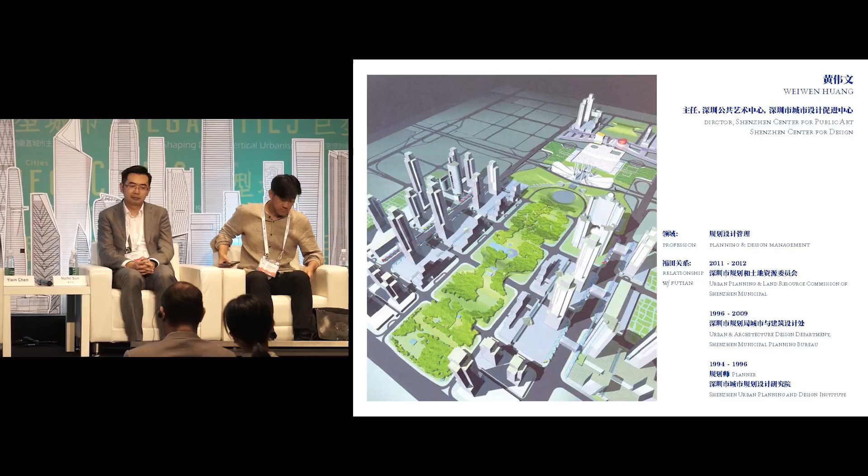Huang Weiwen. He's the director of Shenzhen Public Arts Center, and he's been working with Chen Yixin for many years. He's also contributed heavily into the urban planning in Futian district. And the new height of the city, North Tower of Ping An Bank, is under the responsibility of Mr. Huang as well. He's a longtime friend of KPF.

And next to him is Li Mu. He's the executive director of Ping An, and we know this Ping An Tower will be completed by the end of the year. It's going to be the new landmark of the city, and we also have the developer on the panel to share their insights and comments.

And finally, it's Mr. Li Mingyi. Maybe you don't know him very well. He actually worked with Chen Yixin together in the early days. He's the consultant, a Chinese-American.

The reason I'm talking about him is that he's my uncle. I know he's the architect, but I didn't know that he has such a profound relationship with the city. It only came to me rather lately when I was preparing the presentation. So I called my uncle and asked him to share with us some of his insights for the city.

And me personally, I'm from KPF. I've been involved in the Ping An Tower since 2009, so that means I've been working in the city for 9 years.

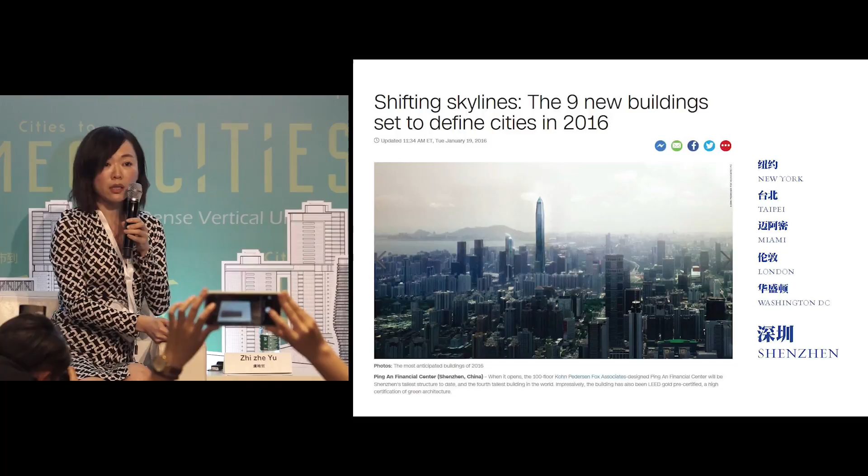I'm not putting the slides here because I'm involved in this project. I actually want to allude to these other cities like New York, Taipei, Miami, London, and Washington. These are very old cities, and Shenzhen is very young, only more than 30 years old. Now Shenzhen is ranked among the other peer cities. That's something profound for the city.

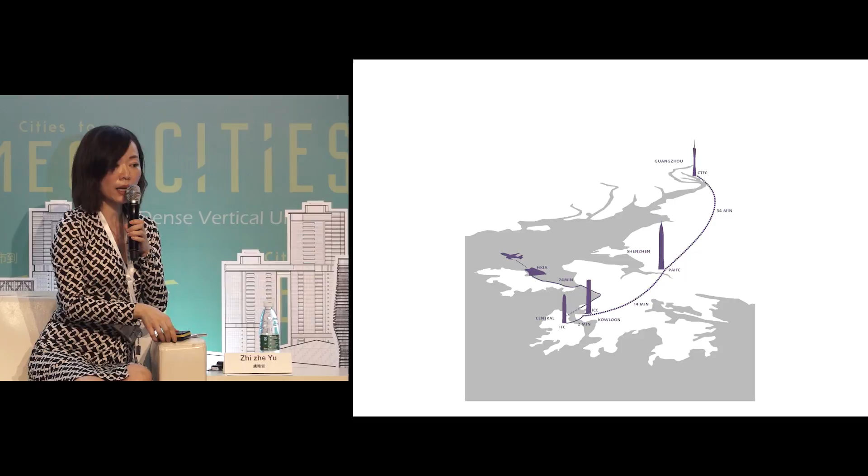This is the high-speed rail between Guangzhou, Shenzhen, and Hong Kong. After Ping An Bank, you can see the high-speed rail goes all the way to IFC, Hong Kong, and Guangzhou. So as you can see, Shenzhen is becoming more and more important in the Pearl Delta. That is the development of the city.

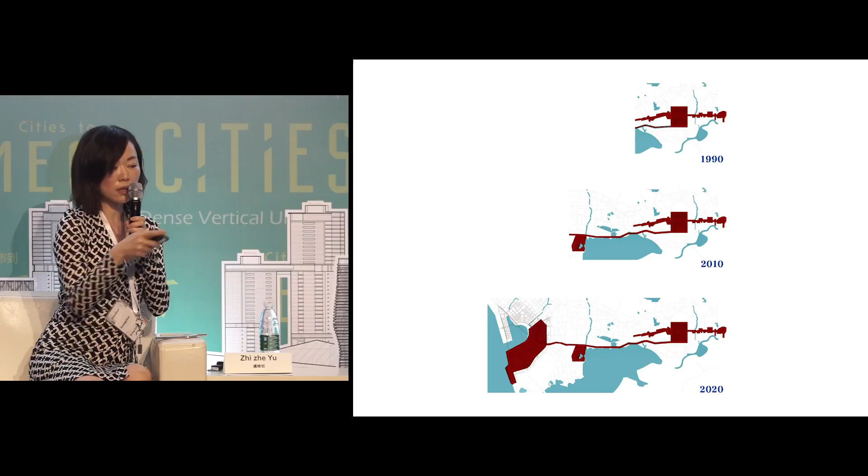In a nutshell, we started in Luohu. The city has developed like a line, and then it goes from Luohu to Futian, but still it's the center of the region, and then it goes to Houhai and Qianhai.

This is also a quote from Ms. Chen Yixin. She said, Shenzhen is a city built upon blueprints of the city plan, a miracle in the history of city planning. Futian Central District is a great example. As you can see, this is a place developed from scratch over 30 years.

I have some historical lineups from the Futian district, but I'd like to give the floor to Ms. Chen Yixin. This is the location of Futian.

That's exactly the center of the special zone of Shenzhen, like Ms. Yu said. Futian CBD is developed exactly according to the blueprint of the city, as the second CBD after Luohu. So coincidentally, in 1981, the master plan of the city established that the Futian CBD is going to be the city center of Shenzhen.

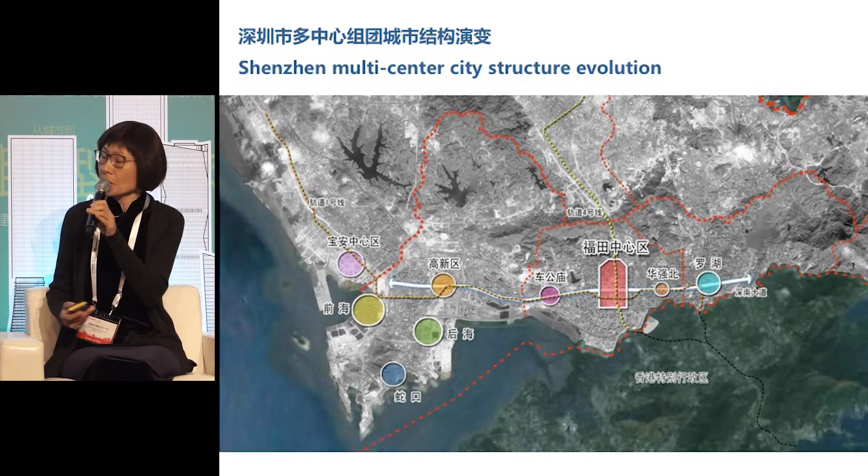And in 1992, it's been positioned as a financial CBD center. So the function has been implemented, meaning the financial sector is prosperous now, but the form is not actually fulfilled as the city center. That's why we have this topic today called Re-centralization in Futian.

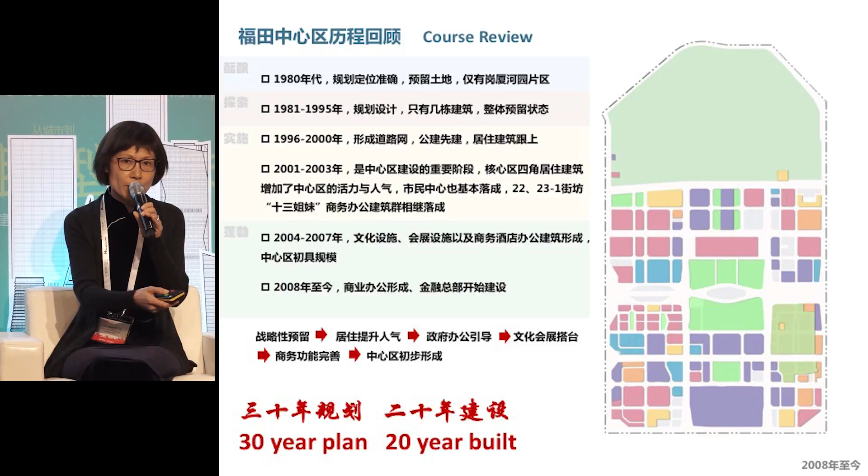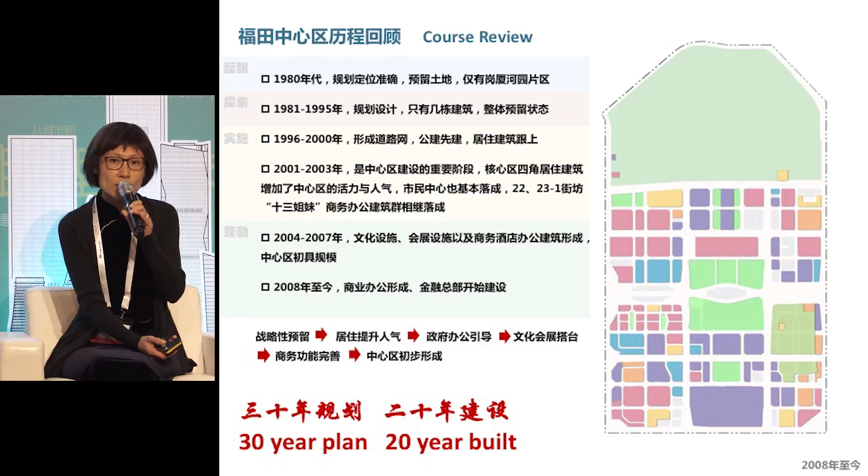Just for your reference, the difference for the past 35 years. Before 1996, Futian CBD had only a handful of projects, and most of the projects have been constructed after 1996. It's been developed in 4 stages, and now 95% of the projects have been constructed.

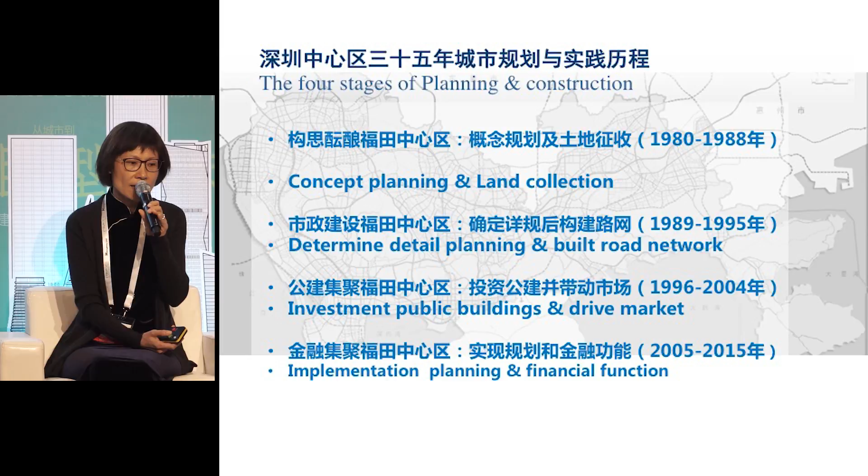So the 4 stages: in the first stage, from conceptualization to land acquisition. In the second stage, it's about detailed planning and construction of the road network. In the third stage, we have public investment to drive the market. In the fourth stage, we have implemented the planning and financial functions of the region.

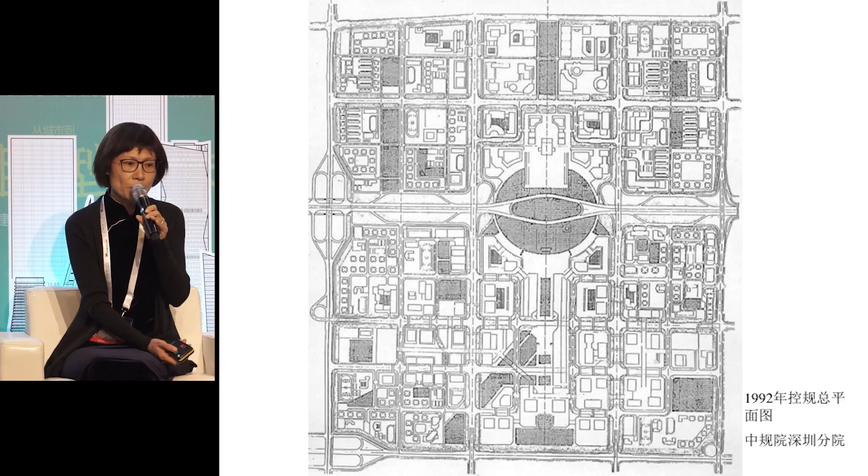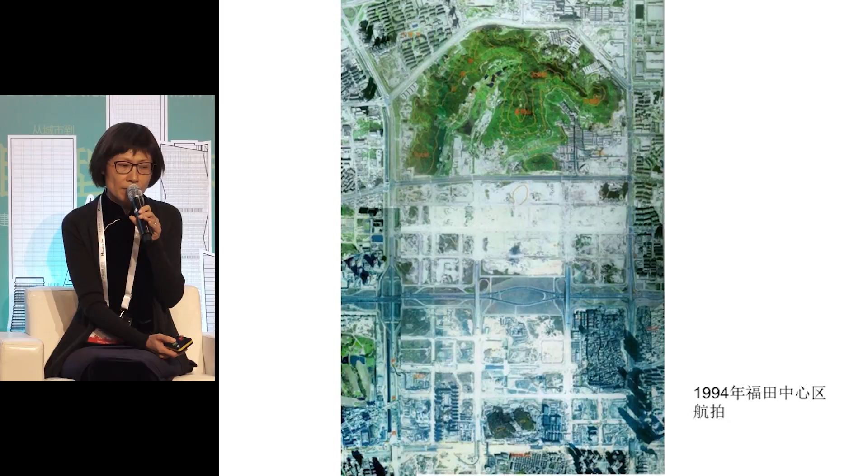Then in 1992, the controlling master plan was confirmed. This is Futian CBD in 1994, the area view. The road network just started its construction. It's empty land, also the old Gangxia village and some planned buildings and other buildings.

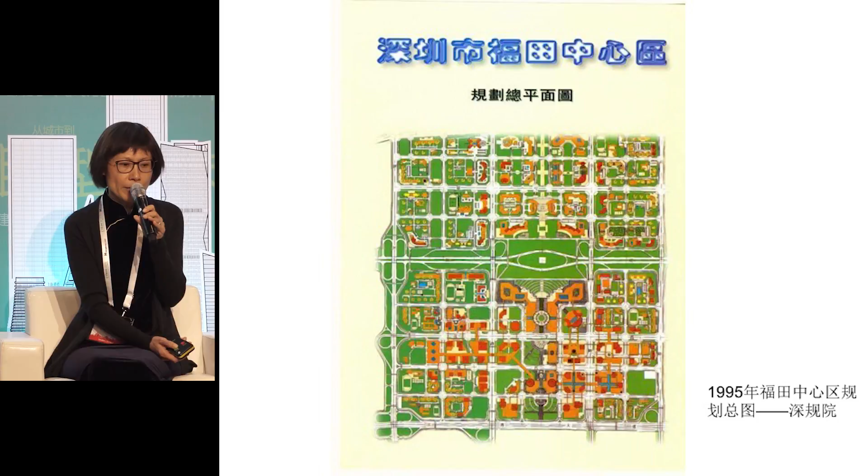This is the model in 1995. The Twin Tower is the current location for the convention and exhibition center of Shenzhen, close to Shenzhen Ping'an Finance Center. That's the master plan in 1995.

This is in 1996. John Lee's firm was awarded for the urban design and the civic center. This was the first time the central axis extended from 2D to 3D, starting from here.

In addition to the urban design, another important thing is the civic center, which is a red, yellow, and blue building in the center. That building is based on the scheme of John Lee for implementation. That was the scheme during the building stage.

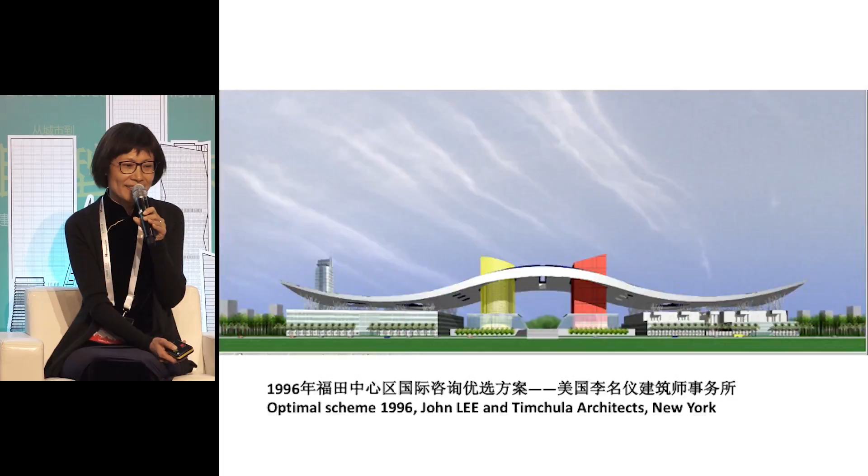This is the central axis for the urban design. The urban design along the central axis separates pedestrians and vehicles. Based on that, there are also several rounds of further in-depth development.

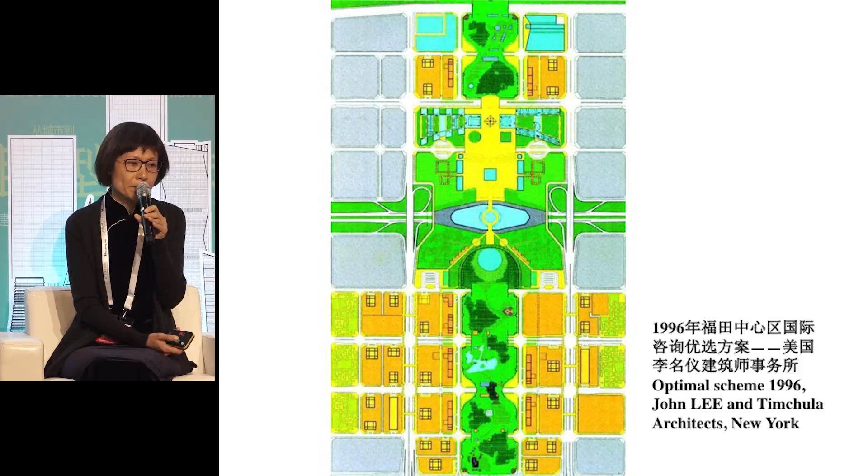Until now, it's incomplete implementation. The central axis, up to now, we haven't had the complete line yet. Only part of the scheme has been implemented.

From this perspective, we can see the municipal government over the past years had a forward-looking vision to leave this part, waiting for development after the surrounding area was established.

So Futian CBD, it's lucky. In 1981, the government determined it as the center of the Shenzhen special zone, but the land was just reserved until 2005, 10 years ago. We still have more than 10 land parcels used for finance head office buildings. This is the optimal scheme in 1999.

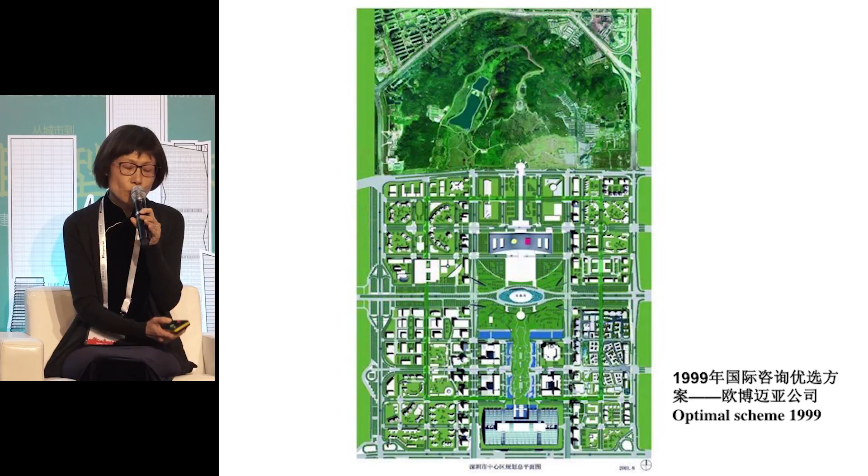So for the central axis, based on the previous plan, it's further developed gradually, but not yet fully implemented. I believe later there will be better enhancement.

Up to now, for the CBD, 95% of buildings have been completed. That is, of our previous plan of about 12 million square meters of floor area, close to 11 million square meters are finished. 64% are for office buildings.

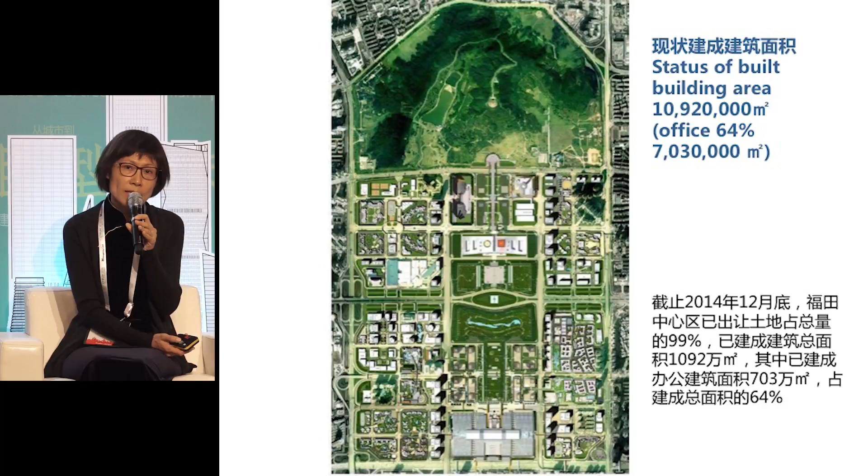So it's realized the CBD combination with the admin, cultural center, and also transport hub. Functionally, it has realized its role as an urban center, but in formality, it has not formed the prosperity with more people, and also for providing people with daily recreation, entertainment, and different aspects. That is a pity for us.

Therefore, today we will further extend the topic of re-centralization of Futian. Thank you.

It's my pleasure to have discussion with you. Over the past 30 years, Shenzhen has developed very rapidly. I believe in the next 30 years, Shenzhen city quality will further improve.

Today, my main topic is related to open space. We believe open space will be key for the next round of city update and environment quality improvement. That will be the focus.

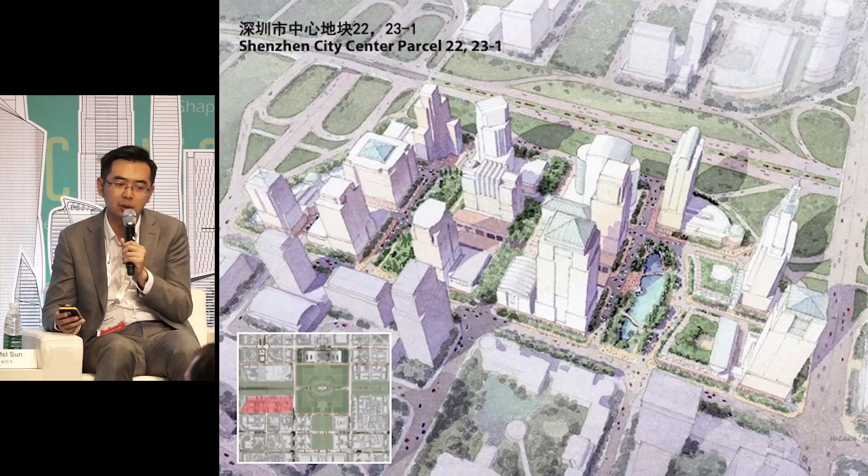This is combined with our previous city planning project in 1998, the research and conservation. For that project, it's in Futian, the Central Park, west part and southern part of Shennan Boulevard. For the original planned road network, you can see here, it's 70 hectares. So for the open space, it's relatively small.

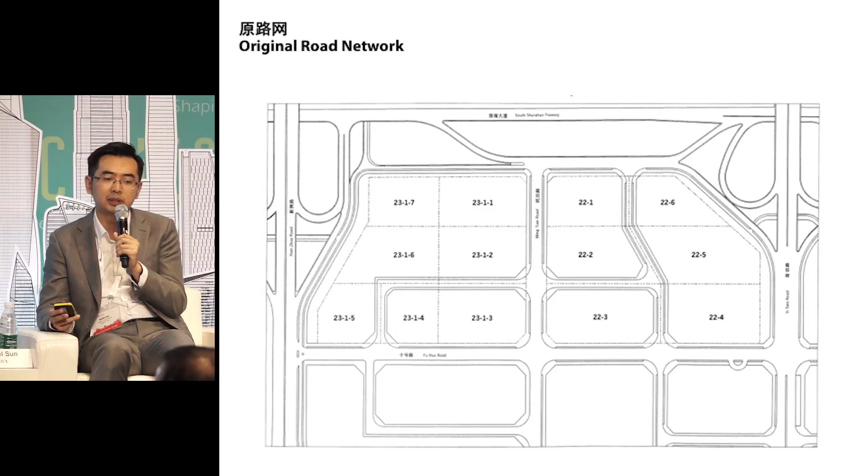For the north parcel, they have a good view, but in the center, in the hinterland of the area, there's not too much landscape value. Our idea is that we hope we can add open space for the area, both east and west, to have parks. Through addition of open space, the value can be further extended to the hinterland.

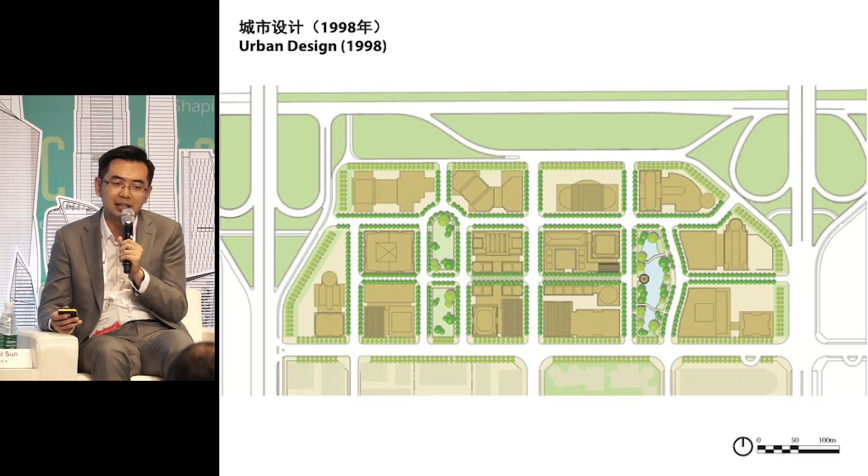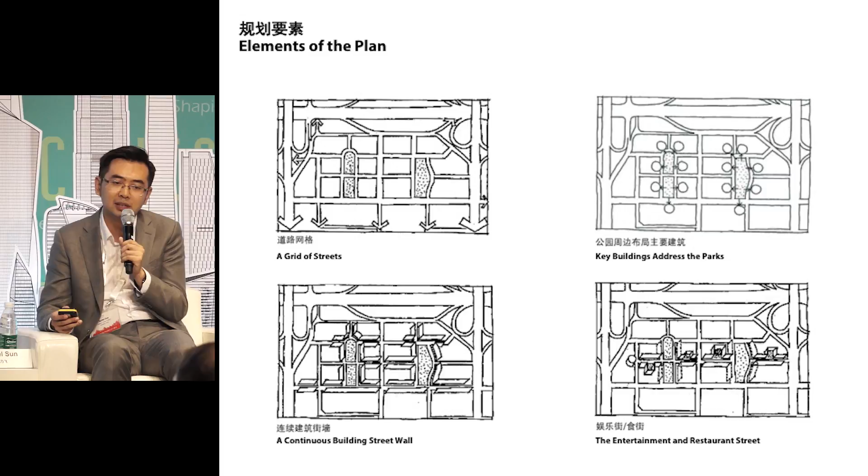Based on that, in the planning, we also add this grid system for the road network. With this available, through urban design, we can further define the limit elements for the buildings, define the street space, park space, and the towers arranged along the park. This gives a better value attraction.

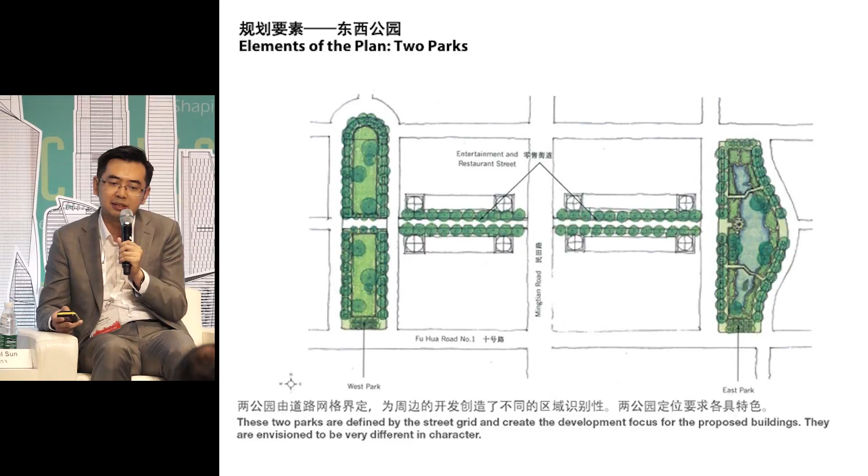For the two parks, that is the focus of the scheme. On one hand, they are different in forms. On the other hand, for future implementation, they are designed differently. This is to distinguish the two different plots.

Between the two parks, our idea was to have a Lantern Street, combining the Lingnan climate with an arcade street, minimum of 3 meters wide. Behind it there will be some retail and entertainment area, providing space suitable for pedestrians.

After 10 years of development, the region has been completed. From the urban design perspective, its implementation is quite complete, fully reflecting the previous urban design aspirations for urban street scale and the spatial layout relationship.

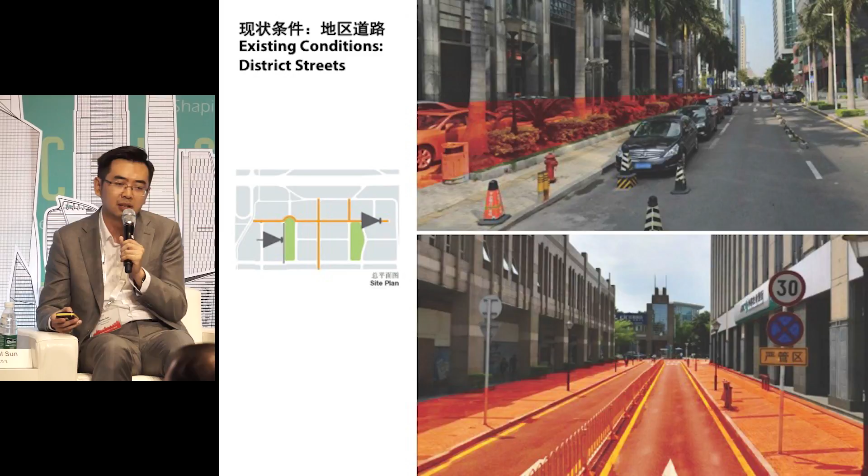After several years of development, we are thinking about what further enhancement we need for the public space and street space. In the future there will be further space for improvement. Now there are some issues - some are urban management issues, some are street landscape design issues, like motor vehicle parking that's still random.

For the greening, it's not yet completed, and the street view furnishing looks too simple. Besides, we feel for the park space, there's still value for further improvement.

After the two parks are implemented, they become important features for society. For the east, more water, and for the west, more open space. For the west, we can add some trees, giving more shading effect in the rainy season.

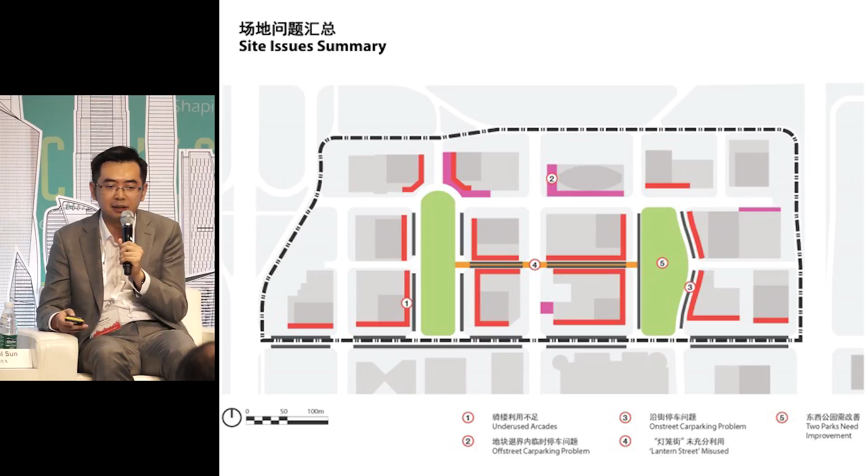For the city's public space - both the park, street view, and the utilization of the arcade - I think that's a further aspect for improvement. This will become the future key point for this region, including the Futian district area, for spatial quality improvement. We hope we can build better street view and environment.

But if you have random roadside parking, it would destroy this pedestrian environment. So we can deploy some new parking space around, or leverage Didi taxi or car hailing service. Then we can reduce the demand for private cars to park here.

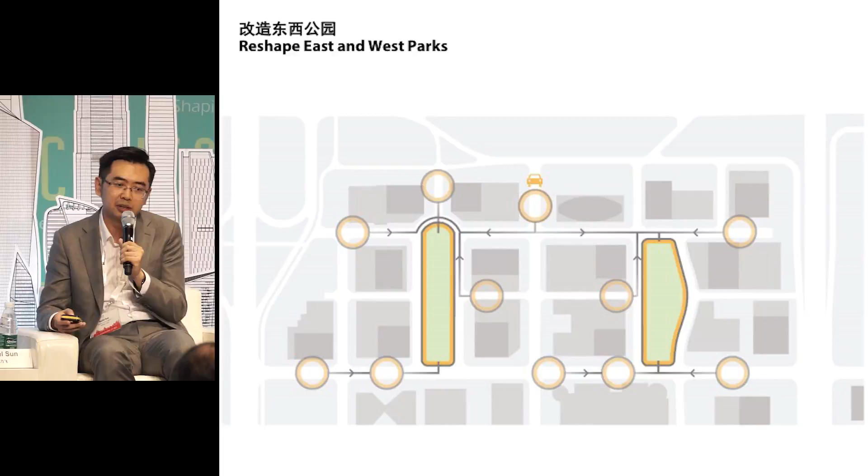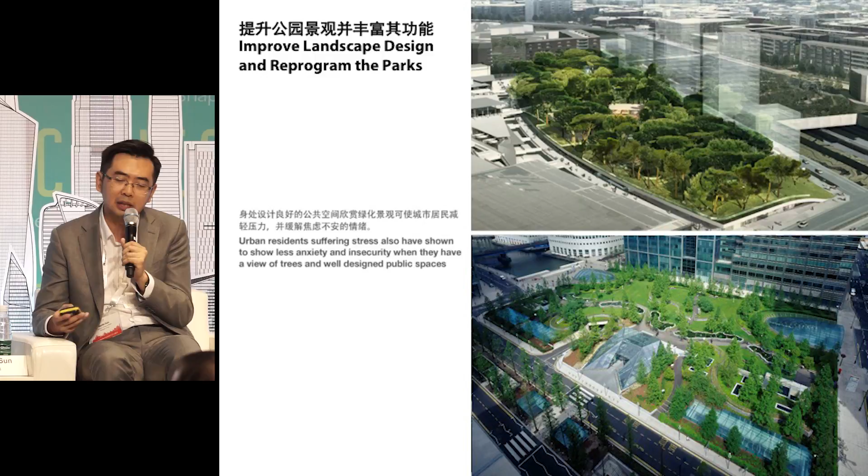For the east and west park, we also have reshaping comprehensively, as mentioned earlier. For the west park, it has fewer trees, so when we make the modification, in the underground space we can have local parking space. Above ground, we can have more landscape enrichment, like introducing more colorful biological modalities, and also add recreational facilities. The purpose is to have more activities related to public art, providing rich experience for the people.

For some streets, they do not have trees yet, so we hope for these areas we can have more green streets. In summer, it can have a better shading effect, and meanwhile help clean the air, providing better quality.

Besides, for some details, they are also very important for the urban quality, like the street furniture and the pavement. These element enhancements can improve the environmental quality of the area and also enhance the features here.

Today, people are paying more attention to so-called smart city or pedestrian-friendly city concepts. Previously, the lighting on the street was more for motor vehicles to travel, but in the future, for the park space, there will be more light for people and pedestrians, providing a safe environment in the evening.

Besides, for smart city, there's a lot of content related to smart public space. Along with internet technology and mobile development, many interact with the city. For example, for future landscape improvements, there will be interactive lighting and water views through a mobile app where you can interact. Our purpose is to provide more interesting, charming, and active public space for the city.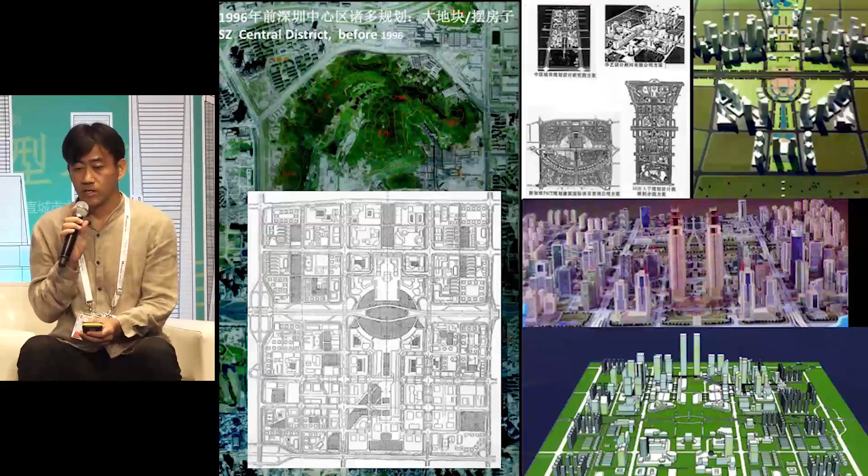Ms. Yu and Ms. Chen already introduced some information about the CBD, so I will go through this quickly. This was in the 1990s, with different kinds of designs. At that time we were just arranging different houses. In 1996 we had our urban design. John Lee's urban design made it in good order, creating a central axis that is more open and continuous. That laid the foundation for the CBD.

This central axis being open for the layout was from 1997. The Japanese architect further turned this into the ecological 3D expansion axis.

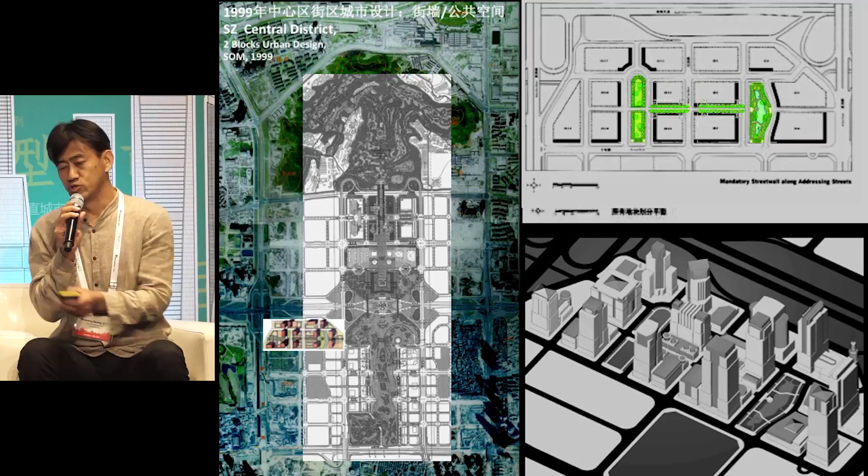This is in 1999. SOM developed the street block design, which he already explained just now. Also in 1999, we invited a German design firm to optimize the urban design.

The density was further enhanced. Then we had two tower zones, symmetrical to each other. Local design firms further developed the axis and block urban design, etc.

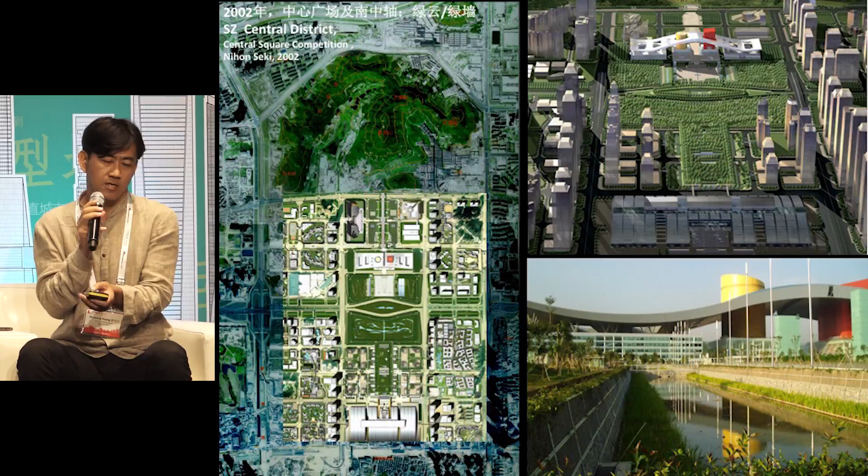Then for the central plaza we held an international competition. A Japanese architect provided this guiding proposal, making the central park more green, like a green cloud in the center of the city.

The island was awarded to OMA and Urbanus. They provided us with this proposal. In general, the intensifying density of Futian CBD has been growing.

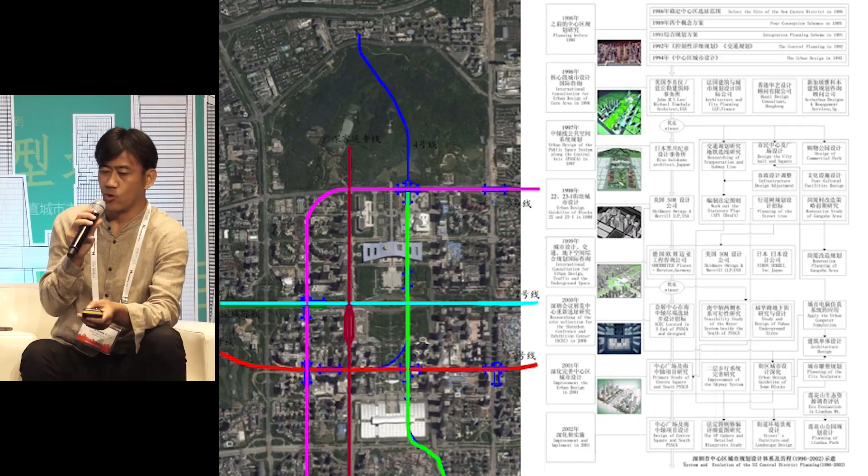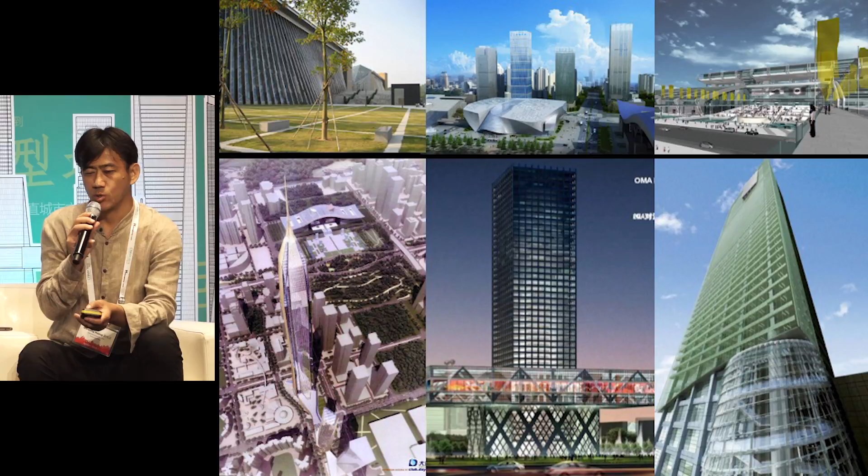We had evolutionary design development, and then we had architectural designs from many masters. That's the vicissitude of Futian CBD.

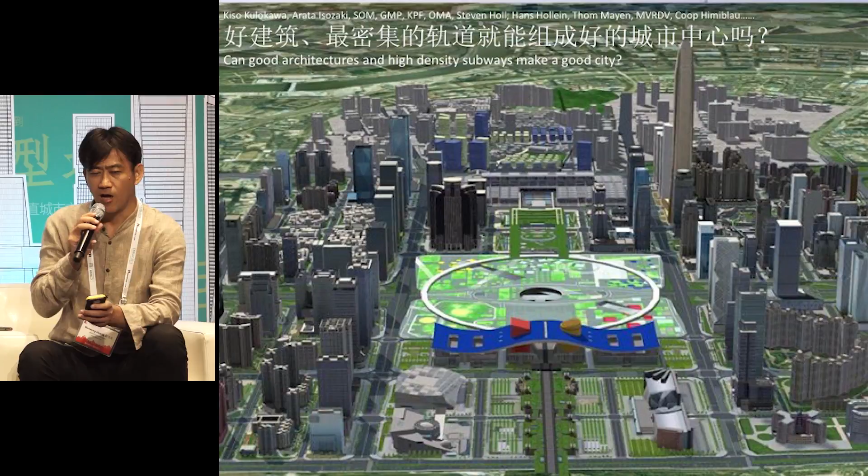So my question is: with so many good planning and architectural designs and transit facilities, does that always mean a good city center? That's a good question I think we all need to ask ourselves.

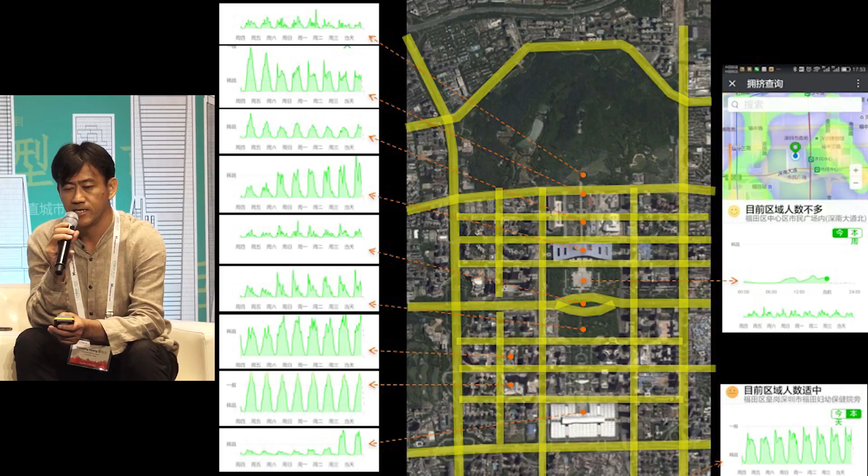I think the reason is that this road network has been separated by motor vehicles, so this center is not accessible to pedestrians. That's where we need to improve.

Like Mr. Chen introduced, SOM developed the pedestrian roads. This is the only pedestrian road in the plan, but it's not completed as we expected.

There are curbs, elevation changes, gutters, and manholes. Those are all problems with this pedestrian road, and many places have been occupied by cars. The arcades, their height, and the connection between buildings are all problematic. We wanted to improve that.

We hired some architects from all over the world to consider another plan. This is the plan, the modified result, and the elevation has been raised a little bit. Under the glass, sometimes it's a manhole, sometimes it's the car—actually we crushed the car that had been parked there for ages.

It's now buried under the glass. This is the final result. The elevation is also the same between the roads, and the fences in the middle of the road have now been removed.

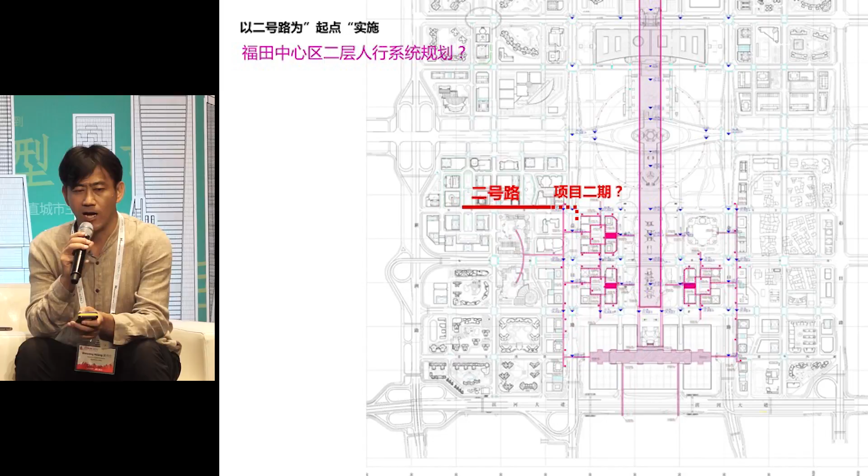The pedestrian-centric proposal is something we want to replicate, because we want to re-establish the pedestrian system in Futian CBD, including the Central Plaza. This is a very big plaza, but it's not accessible to people. We wanted to guide people to travel through the center park, since the road is actually segregating the accessibility.

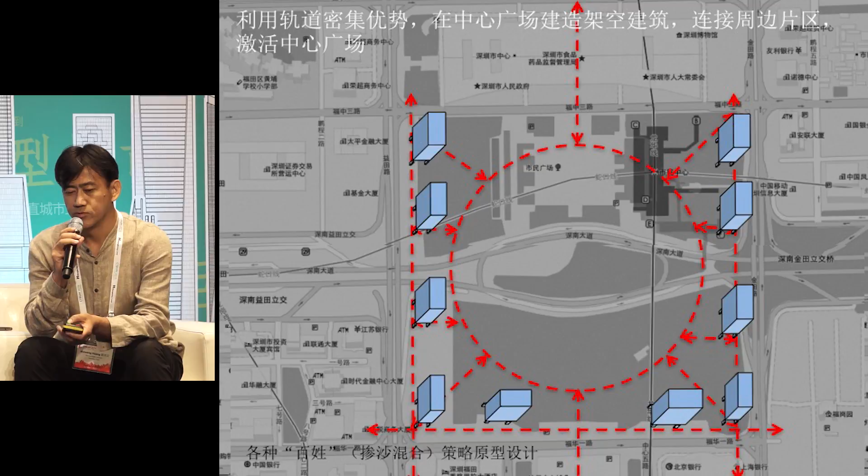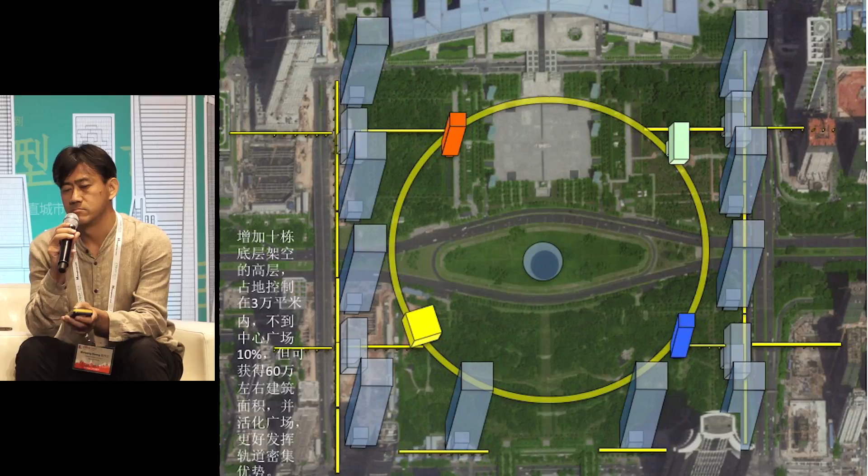I think we can add more buildings because we have a very good metro system, and so we can revitalize the center. Finally it could look like this—we can add new and more functions inside the city center without compromising the green spaces, to revitalize the central plaza and better utilize the land resources.

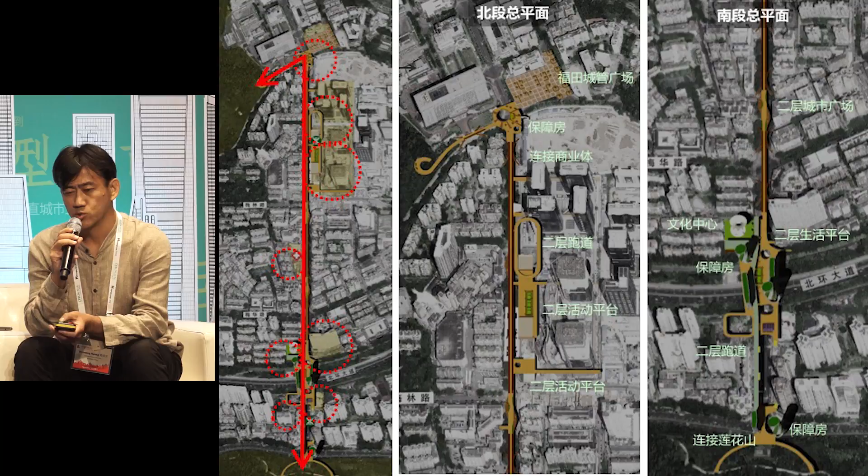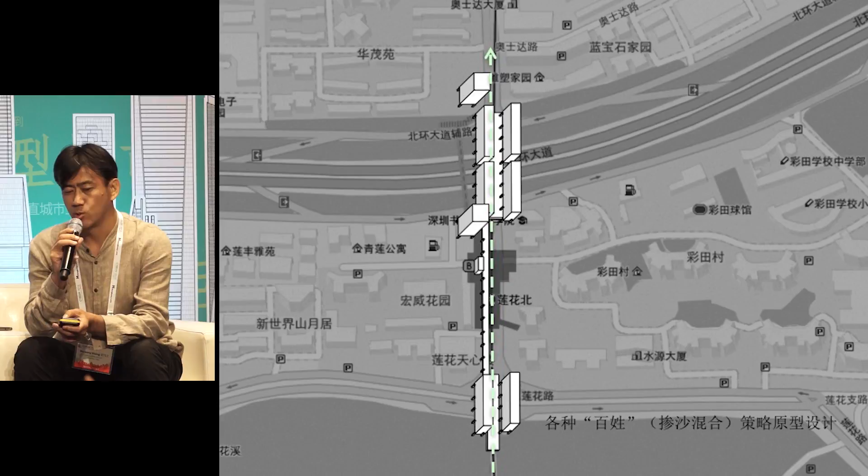This way can expand directly to Lianhuashan. This is the connection between Lianhua Mountain and Meilin, which we call the Zhongkang High Park. We can use the footbridge to connect the mountain to the North Mountain in Meilin, and in the middle we can do some social housing to make sure our younger generation can live in the city center.

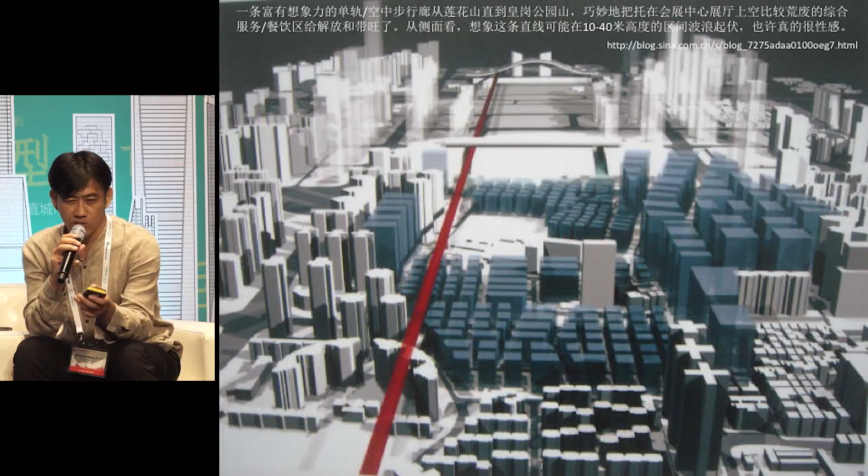Professor Du Jian from Hong Kong University also shared this proposal of extending the shaft to the south using elevated rails or other transportation methods. Maybe you can use these elevated transport facilities to connect the center with the neighborhood. That's a very good thing.

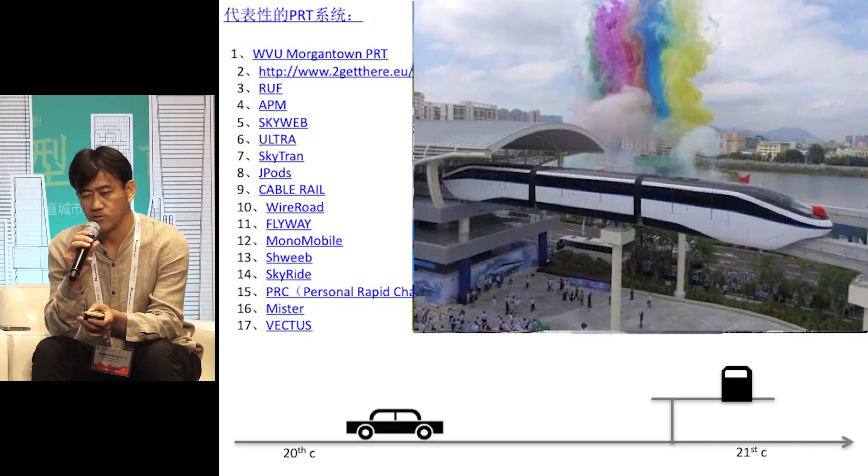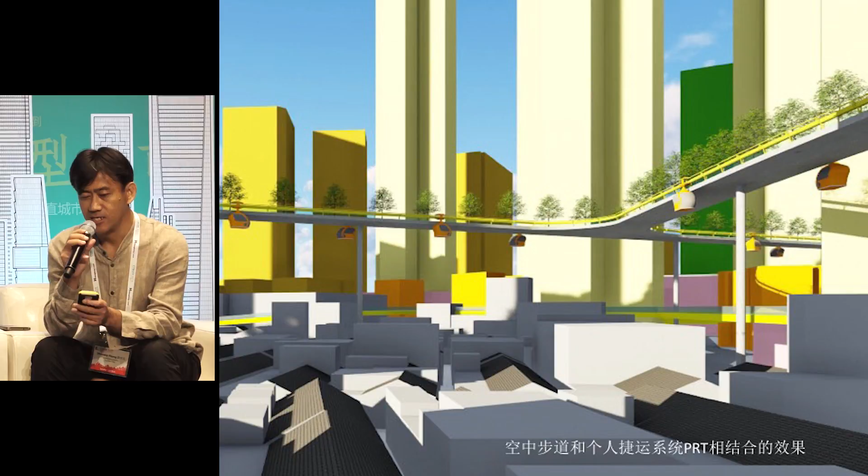Actually, the city has the technology. This is the light rail system announced by BYD this month. This elevated system can be used to improve the Futian center in terms of transportation facilities, and it's also going to be good for the experience.

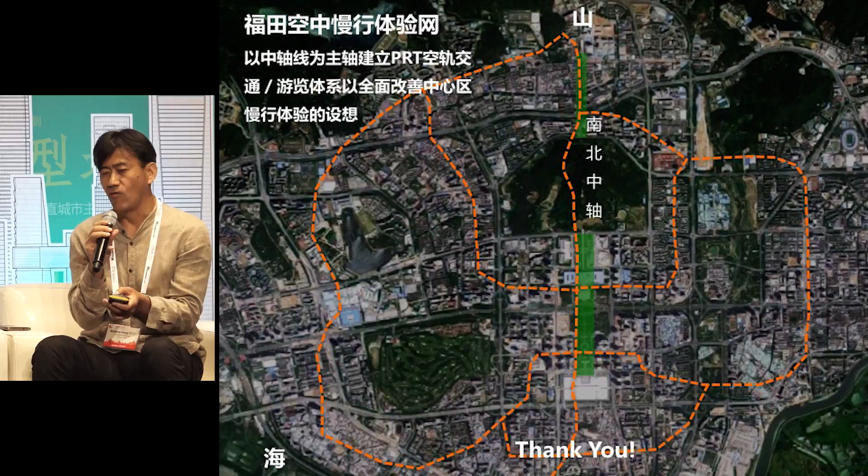So we hope the city shaft is not only a landscape, but also an extension to both north and south. And we hope to create a system out of it to connect the Futian district and to make the entire district a pedestrian-friendly district. That concludes my presentation.

Thank you. I think the arrangement in Shenzhen, Hong Kong, and Guangzhou actually reflects the new height of urban development this round. Shenzhen has most of the 300-meter high buildings in China, so the topic of the forum is highly relevant to the city. I think it's very inspiring for all of us, be it professionals, government officials, or developers. I think we can all learn from this forum, which is why I want to thank the organizing committee.

Secondly, we know this session is about re-centralizing Futian Center. We know Ping An Bank's tower of 600 meters will be ready by the end of the year. That is the most important landmark of Futian. But now, how can we connect the tower with the region? As the responsible developer, Ping An is also working closely with the government, citizens, and professionals to find solutions for further optimization and revitalization.

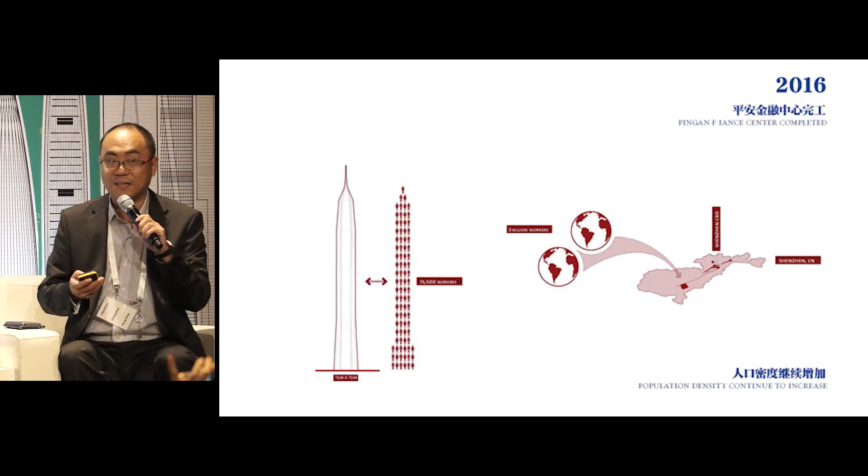So we're not only considering vertical development, but also horizontal development. As developers, we want to help the government and citizens connect the tower with the city and the neighborhood to create a more comprehensive space, because eventually everything in the city is serving the people. The most important thing is the experience of the people.

So in Futian district, we have been talking to the government authorities recently. We want to contribute to the revitalization of the city center with our opinions. We know the financial CBD of Futian has already been established. In the early days of the master plan, we had a very strong central shaft, with civic centers, plazas and greens, hotels and offices, and the tower also on the west side of the central shaft. So we want to further optimize this place.

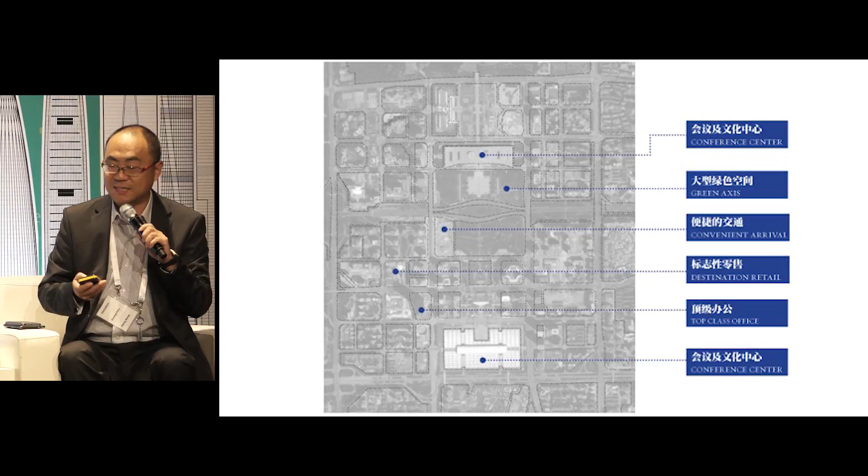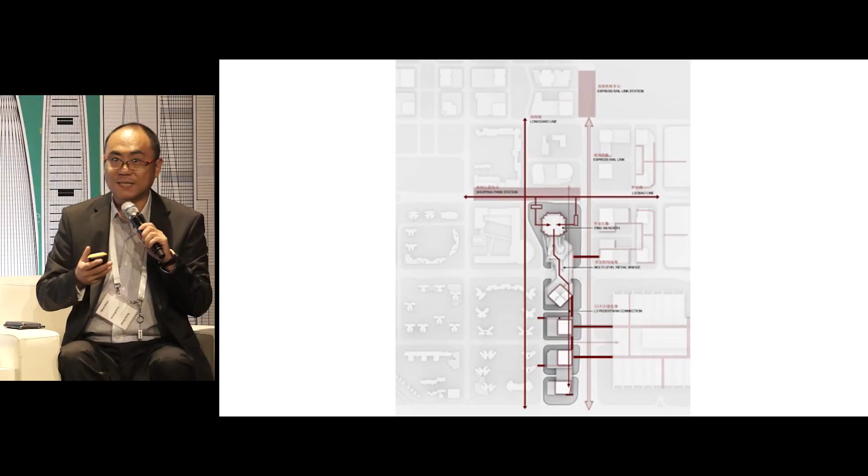And we've chosen some case studies for reference, globally this is a local design. The north-south tower of Ping An and its extension passes in the south, and we talked about the circulation of pedestrians and transport in the neighborhood. At the beginning we were only talking about this part of the land, but recently we want to expand the project vertically and horizontally into the greater Futian district.

So we have identified some use cases globally and domestically, looking at pedestrian systems. We want to use a three-dimensional construction to enhance the space quality in Futian. It's not just about pedestrian space, but also a socializing platform for people. So we looked at the Lujiazui footbridge system, and we also looked at the central bridge of Hong Kong.

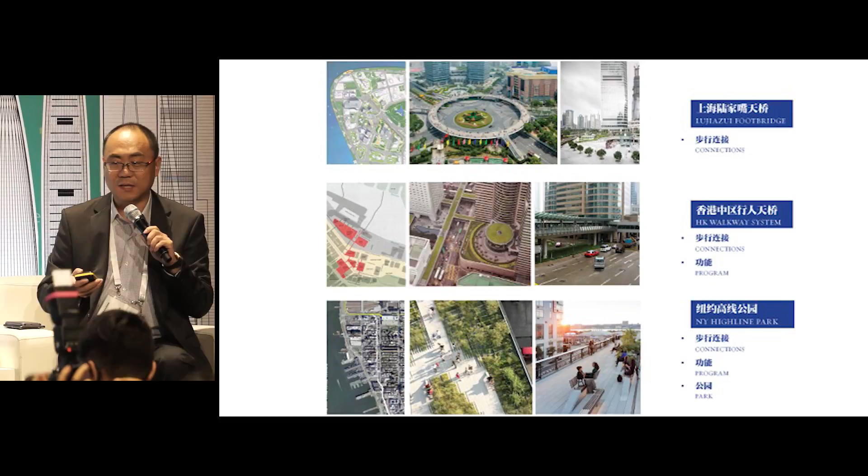Another one is High Line Park in New York, which is a popular topic recently. In Lujiazui, KPF has been involved in that project as well. You see in this project, inside a CBD center, all we need is to optimize the pedestrian space inside a CBD which has already been designed and constructed, looking at the different zoning and its relationship to the towers and the greens.

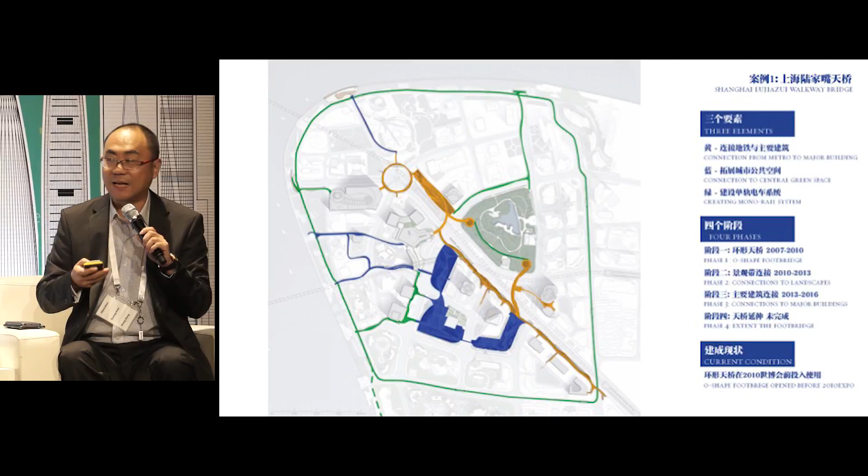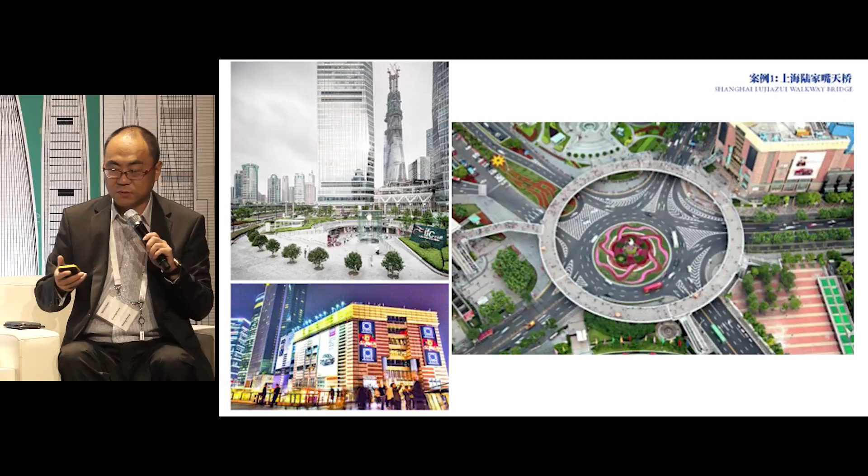Unfortunately, the implementation is not done entirely. It's only implemented in the orange spaces because the land title belongs to different developers, so it's very problematic if you consider that in the later stage. But the pedestrian system in Lujiazui has been highly acclaimed by the citizens, because the footbridge has actually enhanced the pedestrian experience, and with this connection the buildings are connected in the neighborhood.

It's a region that's being constructed. This is another example in central Hong Kong. Two strengths of the project are that there are not many developers, so it's mostly developed by a handful of developers. And in Hong Kong, the government also has some preferential policies.

That's why in central Hong Kong, the footbridge is more well integrated with the buildings. So it's more successful to some extent, but it's only limited to pedestrians.

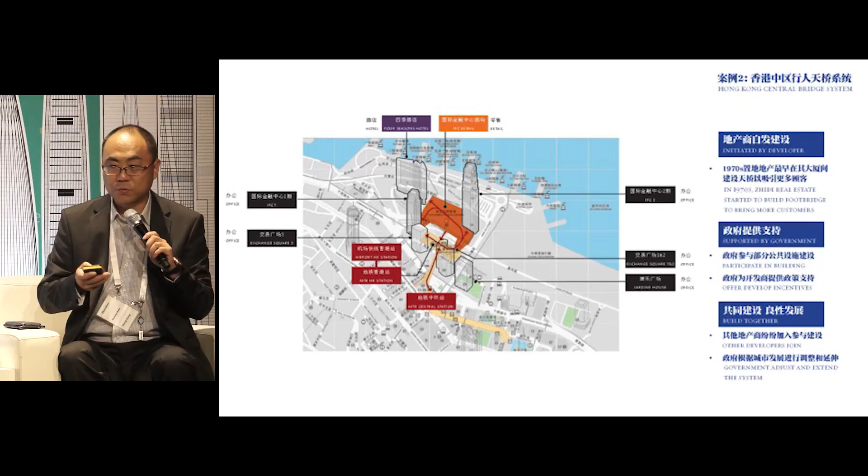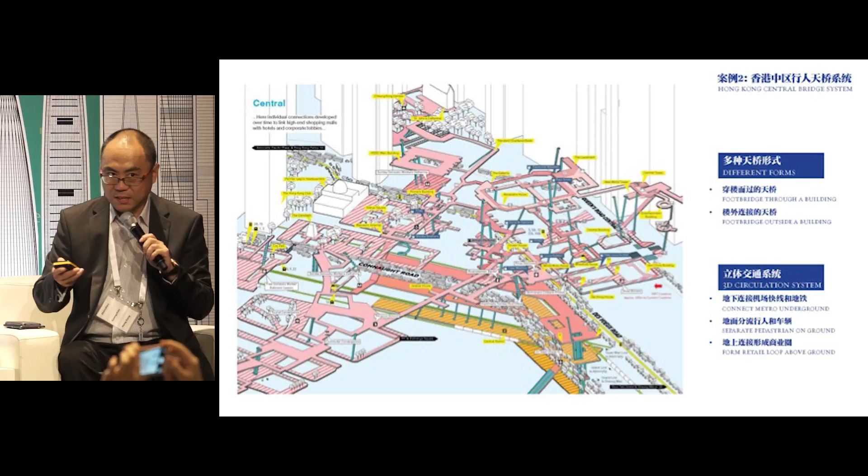The different functions are connected with the pedestrian facilities. This is the central pedestrian connection. The subway, buses, and port facilities are connected in a three-dimensional way across different buildings.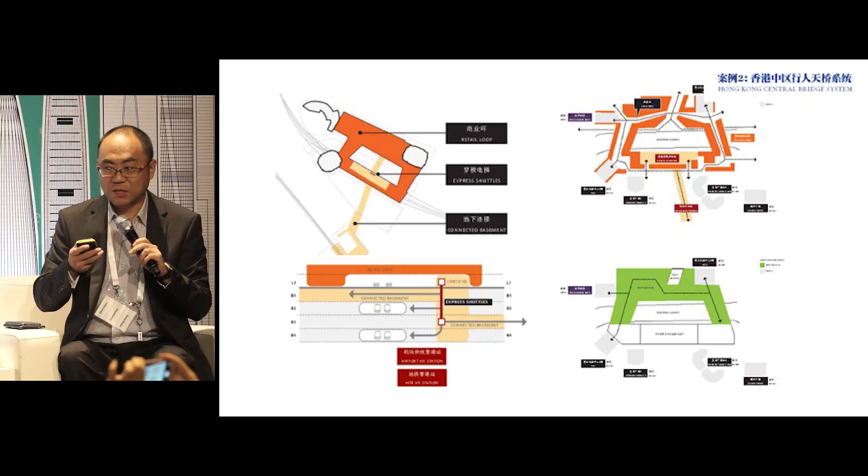This is the vertical space at different levels and elevations, and that's something we want to emulate in Futian, because they are making better utilization of the vertical spaces in Hong Kong.

This is another hot topic recently, New York's Highline Park. It's unique because it has a rail track space.

This rail track has been optimized and developed further, but it's not just for the pedestrian system. It actually provides a public space with multiple functions and uses.

So for developers, this is just a design case, but it actually brings us more inspiring thinking. The Highline Park...

After the first and second stages of construction, the land value has changed drastically. This number is only for your reference, but you can see a public space opening to the community can actually bring more value for the entire region.

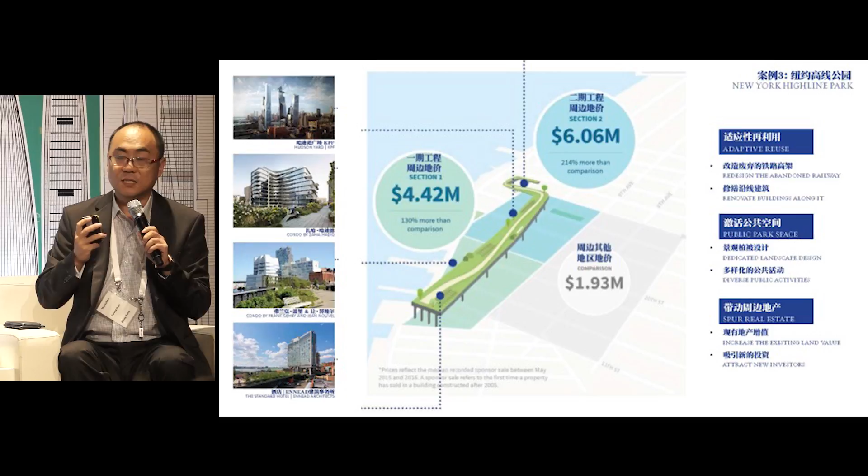This is also a very good model for the self-improvement of established areas of a city. Of course, the Highline Park in New York has special features because they already had the elevated rail track, but the idea can be combined with each local city's conditions.

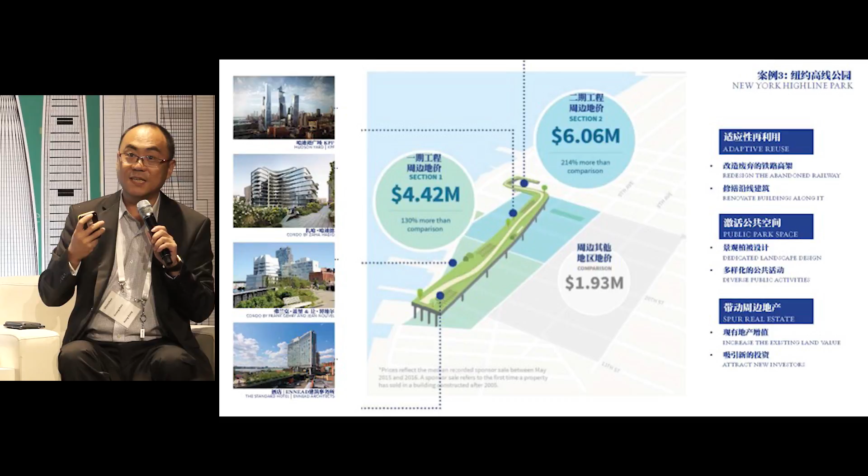For urban public space, it's not free investment by the society or the government. They want better urban development for the motivation and value behind it. That is what we think New York's Highline Park is a good reference for urban development.

So here we can see this was not done in one shot based on special features, it has been developed in several stages.

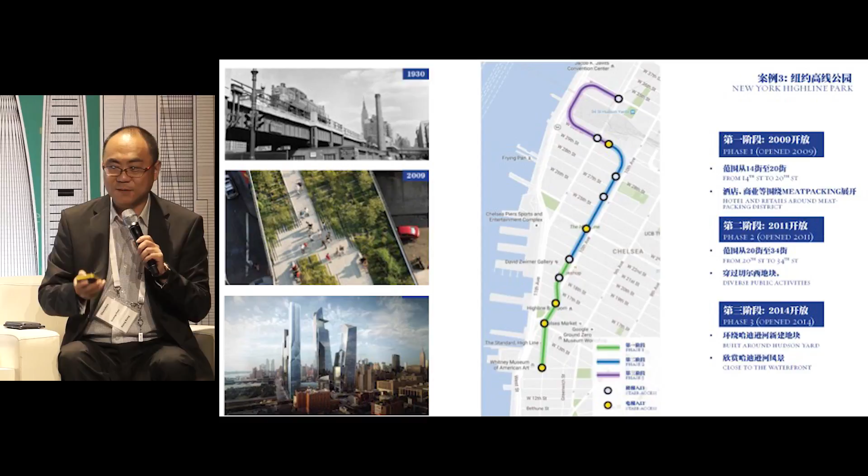In Futian district, we hope we can reach consensus between the government and the developers. If there's a good design, it's also possible to implement it in different stages, then different nodes in Futian can be elevated. That's why Ping An right now hopes to work together with the government, professionals, and the public to discuss how to further enhance the quality of Futian.

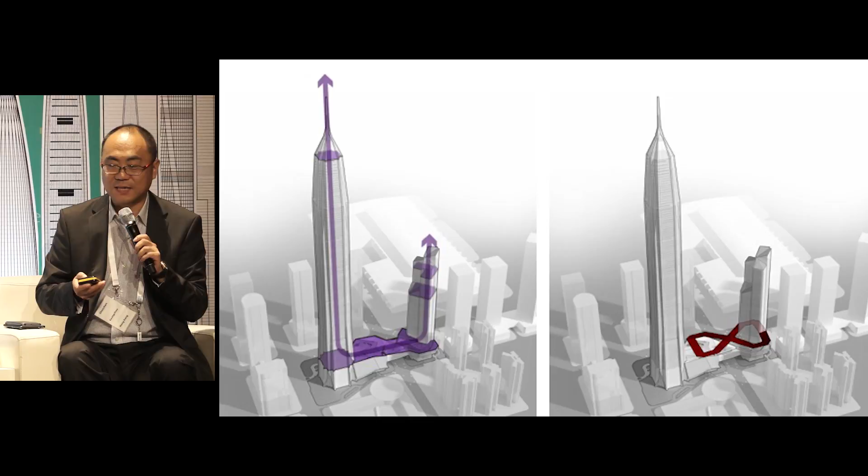This is only our South Tower and North Tower design. The platform crossing the city is now being implemented along with the South Tower construction, and the space will be realized. Our idea is to have a public connection between the two plots. At the top of the podium there will be open space with an observatory, and in the hotel of the South Tower we have public open space, so both vertical and horizontal space can be connected. This is our idea for the project implementation.

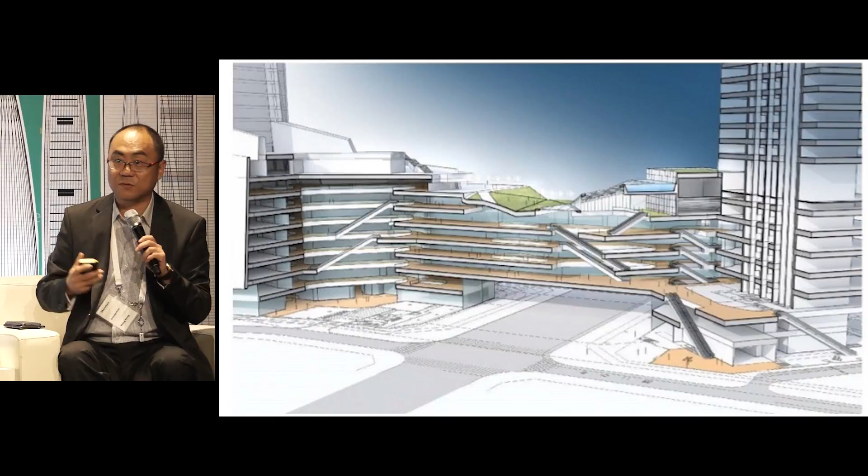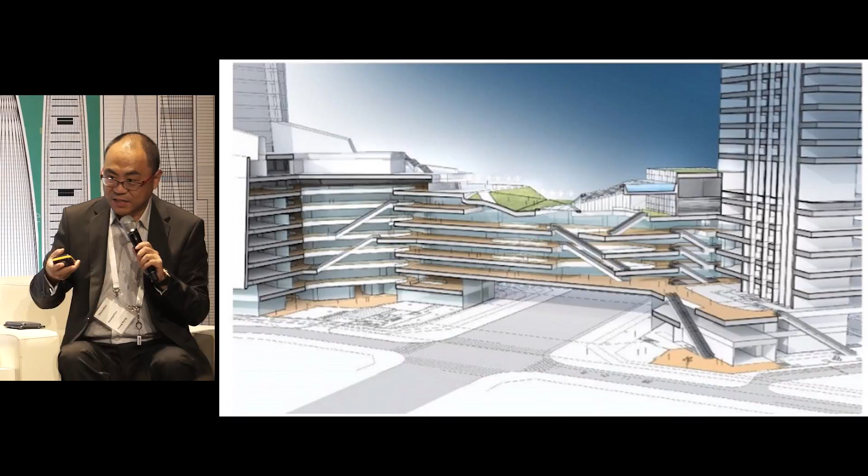Here you can see the three-floor platform. How do we open this to the public? This will be open 24 hours to the public, to the citizens. So we hope through this project, the Futian district can provide this 2 or 3 floors of public space as a starting point.

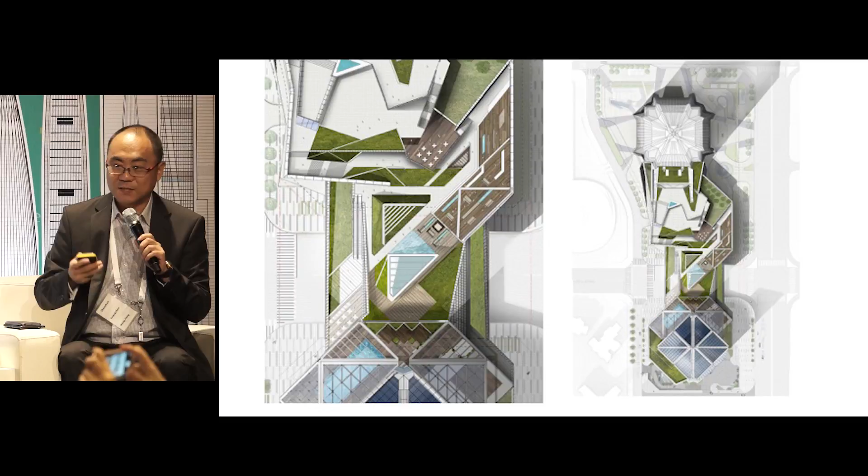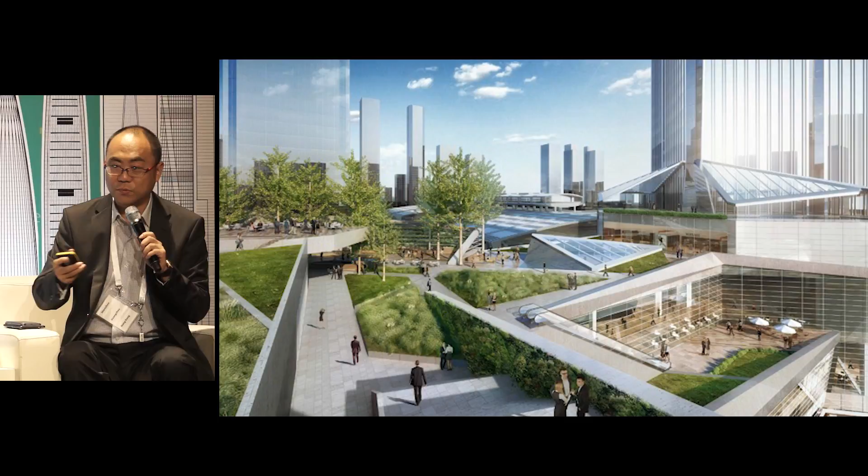This is the layout plan. You can see at the top of the podium, it's not just the architectural plan — what's more is the feeling for people, for pedestrians to walk. Meanwhile, it provides different open spaces for the citizens. This is our thinking for the project.

We hope through Ping An's South Tower and North Tower to open up the second and third floor platforms. Then Futian's three-dimensional open space can be opened.

Here we can see the east-west rapid transport and the distance among different buildings; it has enlarged the space between the buildings and the pedestrians. We hope with the government's support here in Futian, based on the South Tower and North Tower of Ping An FC, we can further enhance the area.

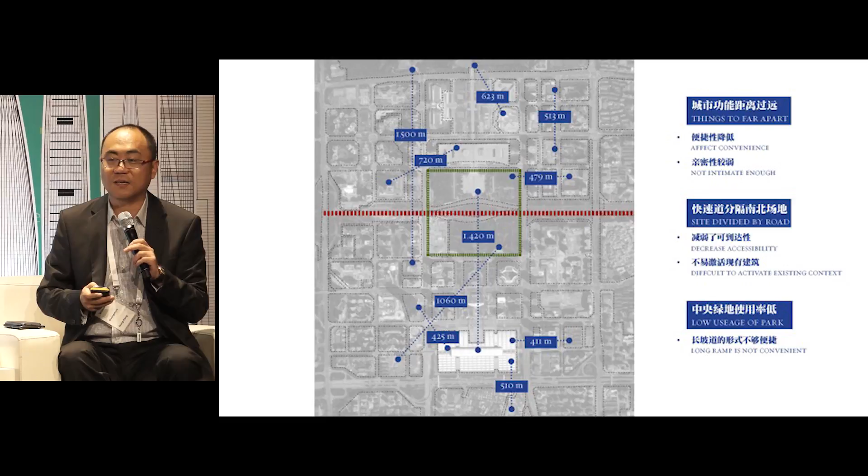Mainly for the 3D space, we can provide public open space serving the citizens, including combining it with the current greening to emphasize the central axis of Shenzhen and Futian. Then we can attract people to come around to Futian CBD and enhance the prosperity here. This is our preliminary concept.

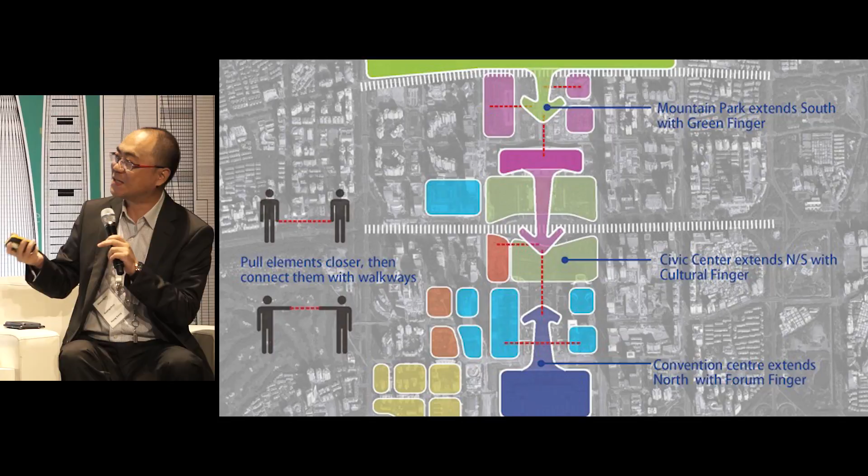Different functions, we want to further link them together. This is from the development perspective, our ideas. Of course, different experts have their own concepts too. This can be a direction for our discussion.

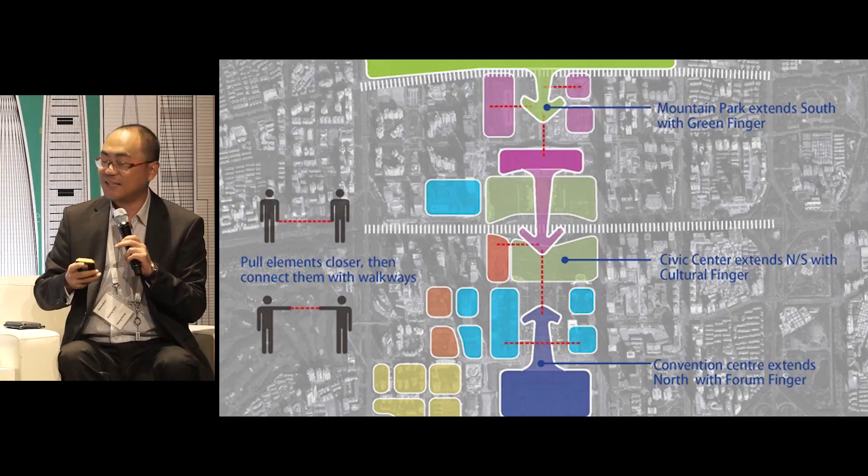The main purpose is that we hope Futian, based on its current status, can be further improved through new design approaches and languages, so that we can create a good environment for transit here. This is what Ping An is starting right now. Thank you.

In 2009, when I came to Shenzhen for the first time, I had a question about Futian district. As Mr. Huang mentioned, it's not so prosperous with people here. But across Shenzhen Boulevard, many people are there. This is the area where people are willing to go. So I had a question: why is there such a Shenzhen Boulevard which divides the Futian district from north to south?

This time, when I made preparations, I noticed the previous master planning had a central design above Shenzhen Boulevard, so that the urban park would cross Shenzhen Boulevard to link the two parks together. So that is my question that I would like to know. Why is there such a boulevard?

So we mentioned that for Futian, it's lacking connection, walkable areas, etc. This is directly related to the Shenzhen Boulevard crossing that area. Why? Why was the previous design idea not realized?

Maybe you should invite Ms. Chen first.

Okay, I would like to say first, about Shenzhen Boulevard. When the Shenzhen Special Zone was established in the master planning, Shenzhen Boulevard was the central part among the 3 main east-west trunk roads. This is for living purposes. So we have Shenzhen Boulevard in the center, Binhai Coastal Boulevard on the south, and Beihuan Boulevard on the north. That was already determined at the beginning of the master plan of the Shenzhen Special Zone.